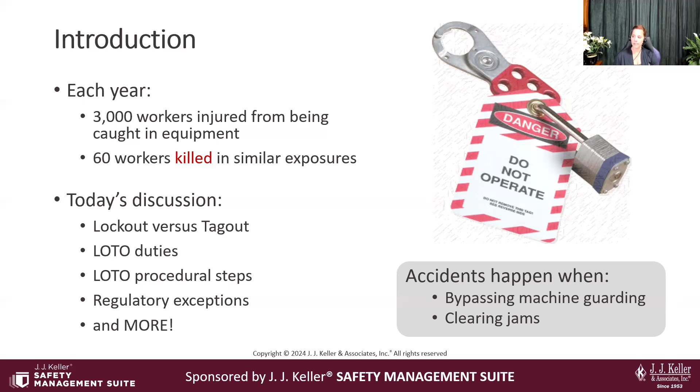Sorry, trying to get my computers here clicking through too.

Sorry about that. So in an effort to modernize the designs, manufacturers may use computer-based controls in their equipment, but you want to be cautioned that recent technological advancements that use computer-based hazardous energy controls, these might be things like mechanical, electrical, pneumatic, chemical, and radiation, may conflict sometimes with OSHA's existing lockout tagout standards. So you want to be really careful on which ones you're using and look deeply into that.

Additionally, there are some national consensus standards and international standards that are trying to harmonize things to govern the design and use of these computer-based controls. This approach of controlling that hazardous energy is more accepted in other nations, which raises issues of needing to harmonize US standards with those. So again, kind of on the leading edge of those sorts of things. So just want to make you aware of that as well. The agency has recently seen an increase in requests for variances for these devices also. So a planned update to the standard is on a bit longer of a road now than they originally anticipated.

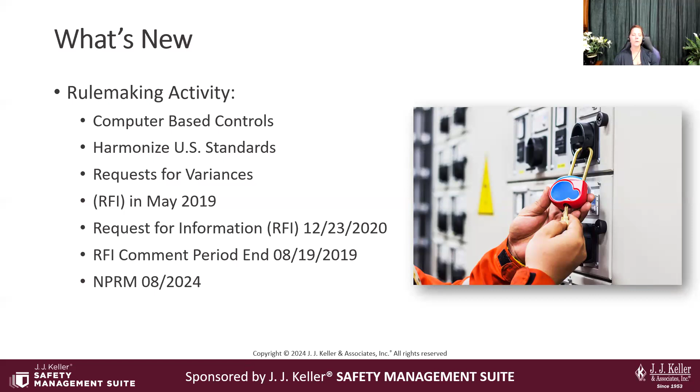So with that, I'm going to turn it over to Joe so he can just kind of see where everybody sits with a knowledge check, I believe. Is that right, Joe? Yep. Thanks, Cindy. So yeah, we want to start out here with a quick knowledge check. And we're often asked to explain the difference between service and maintenance when it comes to lockout tagout. So take a second, what do you think? Is there a difference? You can go ahead and post something in the chat if you want.

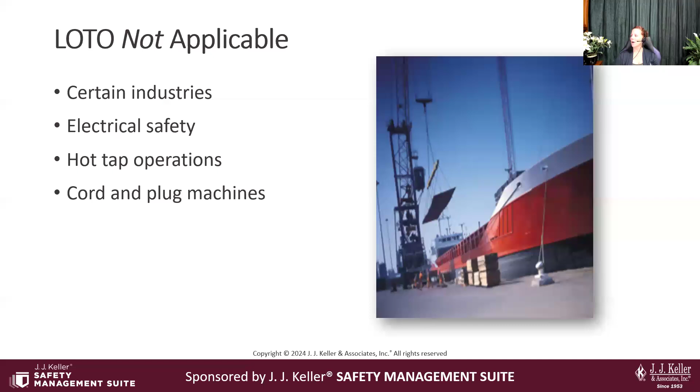Quite a bit not included in the standard, right? But yeah, let's talk about what is. Again, those normal production operations are not covered by the standard. So we always want to keep that outside and separate. And why is that? Well, it's because normal production operations don't ask employees to bypass the safety features or place themselves in harm's way. When we have those normal production operations, we've planned to keep our employees safe. And a lot of times these are tied to other standards, machine guarding or things like that, that keep our employees safe.

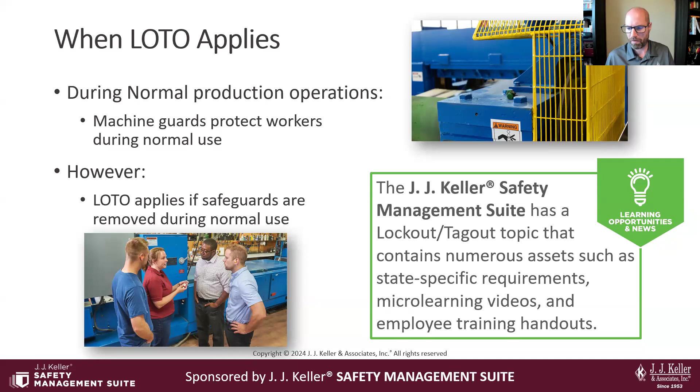However, barring that minor servicing exception that Cindy talked about, most servicing and maintenance during normal production operations is covered by the standard if. And the big if is if an employee is required to remove or bypass a guard or other safety device, or if an employee is required to place any part of their body into an area on that machine or piece of equipment where the work is actually performed, that point of operation. So where that punch comes down, where that press comes down, those are the areas. If I'm going to place my body inside of there, logically we've got to do something to make sure that energy can't harm me. So let's take a look at some of the descriptors on what these devices are that we're going to be concerned with now.

And OSHA's pretty clear on identifying what that means and what those devices should be. So the first one is identifiable. These locks and tags must identify the person who's applying them. So OSHA wants employers to use names, not numbers, titles, or departments. Those can be somewhat vague and not as clear. We want those names, and that should identify who applied the device. It quickly identifies the person responsible, and who to contact for information or on status of the job.

And there are some other ways to identify the authorized employee. We can engrave names on locks. We can add a small metal tab, for example, on the locks or things like that. So there are some optional ways, as long as we make sure they're identified.

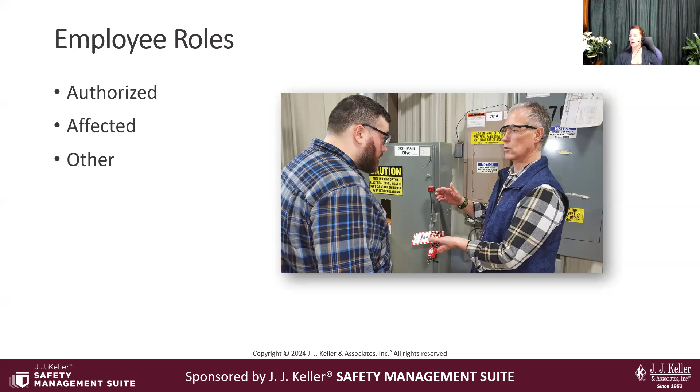Know how to isolate the equipment from its energy sources. So know whether you have to go all the way upstream or just the nearest breaker box, things like that. So very important information for the authorized person to understand.

So when it comes to affected employees, these are those folks that operate or use the machines that are being serviced. So it's your equipment operator, essentially. Sometimes these are the same people, but for the most part, OSHA does see two different roles designated for these folks. The affected employees are most likely to notice that the machine needs repair, so they're probably going to be the person to report it.

They'll also be most affected by the lockout because the equipment can't be used, right? So they're going to be sitting around waiting to see if anything's been fixed. They're also going to be the ones that are most tempted to start it up when maybe somebody's not ready. So another important reason why we do lockout. They don't do any service or maintenance work and must steer clear of the equipment during those repairs. If employers want machine operators or other affected employees to do any maintenance or repair work on a machine, they have to be trained, step up to that next level of training as authorized employees.

Most employers have employees who don't operate machines or do any equipment service or maintenance work. This will be somebody like maybe an engineer that's out there. Some supervisors don't even do the maintenance. They're there to supervise, so that's their role. They are going to fall in that category of other.

Okay, so the standard says that all other employees whose work operations are or may be in an area where energy control procedures are being utilized have to be instructed about the procedure, about the prohibition on trying to start equipment that's locked out, how to recognize those devices that Joe just covered, and things like that. So just to get a little idea there.

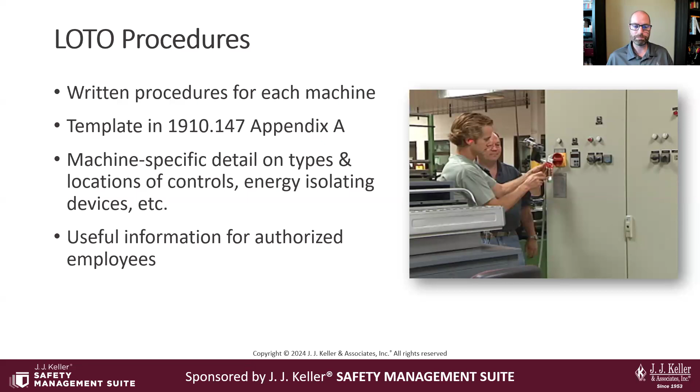So again, we want to include all that pertinent machine information on each specific procedure. If you assign numbers to the machine, make sure to match the procedure to those correct numbers. Also, we want to make sure that they're sequential. And what do I mean by that? These procedures should be easily followed. Keep it simple. So sequential. The authorized employee should be able to follow that written procedure right through step by step.

Okay, then the next piece is going to be to check and make sure that these procedures work. So initially, you're going to want to observe one of your authorized employees and make sure that they can follow the written instructions. What I write may not be clear to you. So if you're following one of my procedures, I want to be out there and I want to see you do it. And I want to make sure you can interpret what I created for you in the appropriate way.

And that's so important. And you're going to find a lot of that out. I found a lot of that out. The way I wrote things wasn't interpreted the same way. And you'll get better and better at that. And then you always want to re-verify that the procedures work, and always verify, of course, that the machine is actually de-energized before the employees start working on that machine.

One other thing to note is that OSHA doesn't require employers to issue a work permit or keep a log or even a record of these events. Some employers like to have these records, but how the permit system or log is set up and administered is completely up to the employer. Again, that documentation is important. If it's not documented, it didn't happen. So remember that as you're working through this.

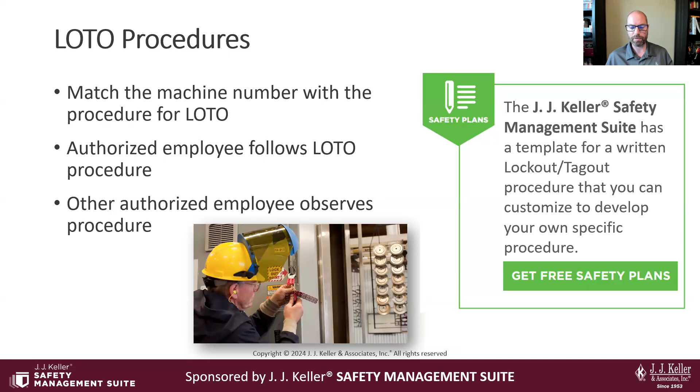All right, now let's look at the simple steps. One is you want to let the affected employees know you're going to be doing lockout tagout. Those who are affected, those machine operators, everybody else: I'm going to be doing lockout tagout. Then we're going to want to shut down that machine. So standard process, shut down the machine. Then we're going to isolate the machine from the energy sources, by whatever means is laid out in that procedure.

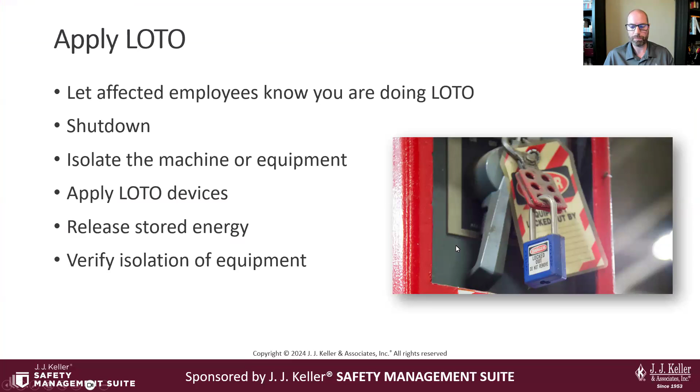Then we'll apply our lock and/or our tag to make sure that it's secure. Then we're going to release or restrain any of that stored or residual energy. That's a very important piece that sometimes gets forgotten about. And if the possibility exists that we might reaccumulate some energy, we have to make sure inside our procedure that we account for that. And then we're going to want to verify the isolation and that the machine is de-energized. Most important step out of all of these: verify that what you did worked. And then you can begin your servicing activities.

So the next step is removing the lockout tagout. Employees can be seriously injured or killed if someone removes that lockout tagout without their knowledge. It's critical that employees respect the lockout tagout, and only the persons who applied it remove it. During that procedure, especially when I'm starting things back up, there are some steps that the authorized employee is going to take into account that someone else may not even see.

Removing tools, making sure that all the loose parts and all the components are put back together like they're supposed to be, and then ensuring that the machine is operational. So we want to make sure all those things are in place as we're going through the process of removing that lockout tagout. Then we're reversing the process back out and starting up the machine. With that being said, I'll send it back to Cindy.

Thank you, Joe. I like to reiterate that step of double checking that your lockout has worked. I should probably just bold that one from now on so that we emphasize it. Most important step: just make sure it worked before you start working on things, right?

So moving on a little bit about grouping similar machines. OSHA tries to make sure that things aren't just a pain in your neck. That's not their goal. So they have this option of grouping similar machines. We've been asked by lots of employers if they can do this. This would be things that use the same type and magnitude of energy in the same procedure. So let's say you have multiple press brakes. I see somebody asked a question about press brakes, so we'll use that as an example.

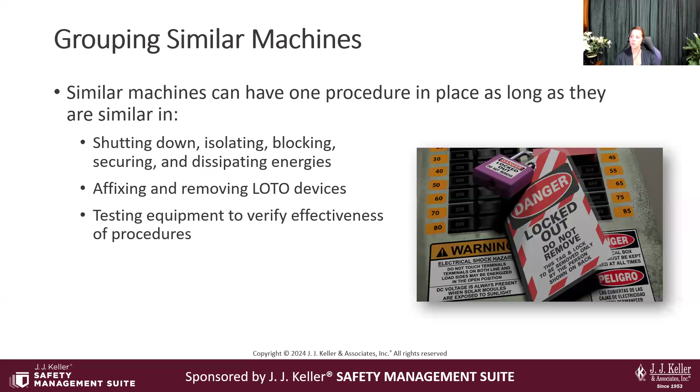For example, at the stainless steel manufacturing facility I used to work in, we had several Cincinnati press brakes. We were able to group similar brakes into a single lockout procedure, and the same with similar die setting machines. They do allow this when the equipment has the same or similar control measures. So just something to keep in mind to make your life a little bit easier.

Here's another surprise for you. You don't always need written procedures. A note in the standard says that under certain conditions, the procedure for a particular machine or equipment doesn't need to be in writing. Now, here are those conditions. Because again, we keep saying that which was documented was done. So documentation is key, but here are those conditions.

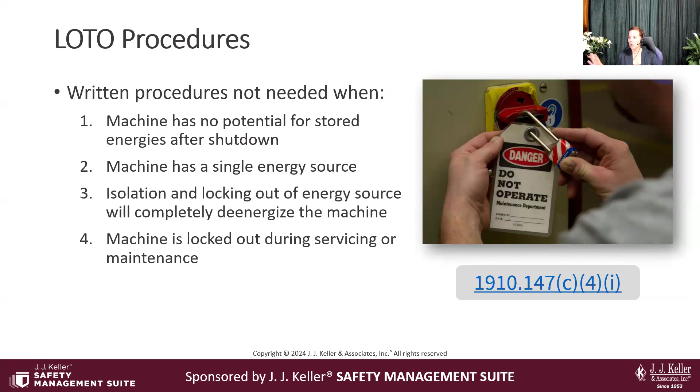If the machine has no potential for stored or residual energy or reaccumulation of stored energy after shutdown; if the machine has a single energy source which can be readily identified and isolated, like a drill press, a vertical bandsaw, or a bench grinder; the isolation and locking out of the energy source will completely de-energize the machine. All of these have to apply. And the machine is locked out during service or maintenance. But wait, there's more. Let's go on to the next page.

A single lockout device will achieve a lockout condition. The lockout device is under exclusive control of the authorized employee; we talked about that with cord and plug. The service and maintenance does not create hazards for other employees. The employer using this exception has had no accidents involving the unexpected activation or re-energization of any machine during servicing or maintenance.

Now remember, this type of equipment still has to be locked out. It just doesn't have that written procedure. Joe and I are in favor of written procedures because that takes out the guesswork. If you're curious where to find this, it's in paragraph (c)(4)(i), and I put that here on the screen for you.

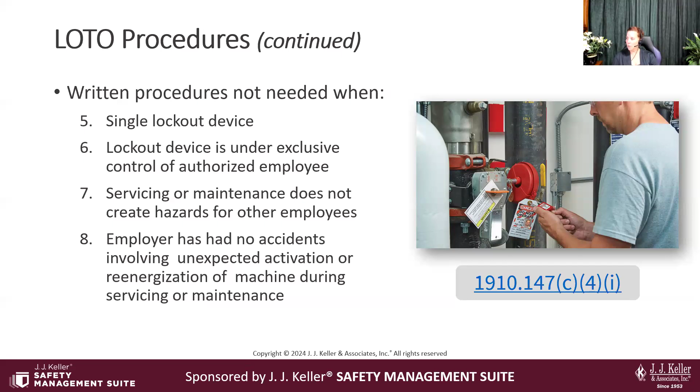So with that said, Joe, what about my favorite, group lockout? Yeah, let's talk about group lockout. When more than one person works on a machine, employers must take steps to ensure that each authorized employee is individually and equally protected.

Then the person who applied the operational locks locks all the keys in the box, and then the other authorized people can add their locks to the box. So it really saves on all these hasps and all these locks and everything else going on. The other authorized employees, OSHA says, still need to have the opportunity to verify the locking.

So in the case of lockout tagout, I have some examples, but I know we're moving on the clock here. You want to make sure you take the time so that even if your buddy locked everything out, you double check the energy isolation yourself before you work on that equipment.

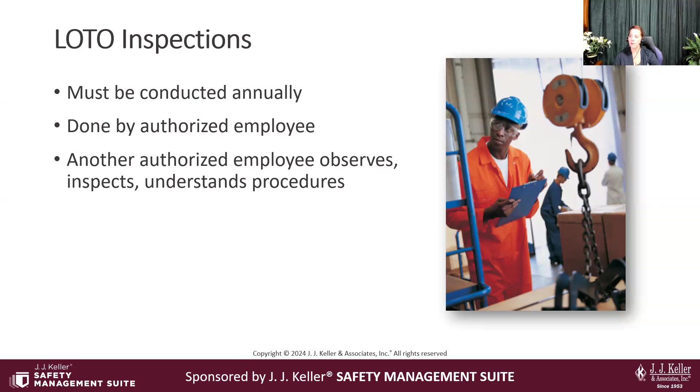These inspections can be done in different ways. You can have your authorized employees who normally use the procedure, or an authorized person from one area, lock out a machine, see if the steps make sense. So different ways you can go about it, but just make sure that you're doing that annually for each one of your programs. Remember, the goal is just to make sure that the procedures are being followed and that people are being safe from unexpected energy.

We've discussed grouping individual procedures for similar machines. The same concept can be applied for the inspections, as I mentioned. As part of a periodic inspection, all of the authorized employees who typically use a procedure must be included in a review of the procedure. Okay, so you want to make sure that you're involving the people that actually have to do this.

If an employer uses tagout instead of lockout, then the affected employees must also be included in the review. So make sure you don't forget those authorized and affected employees both. OSHA wants to make sure that employers are taking extra steps for tagout because that system, as you know, doesn't use as strong of a protection as a lockout. So make sure you're not forgetting that.

Again, if you find deficiencies in your procedure, update those procedures and then follow up with the training. And don't forget to certify that those inspections are being done, right? We keep hinting on that. Make sure you identify in your certification the identity of the machine, the date of the inspection, the employees that were included, and the person that did the inspection itself.

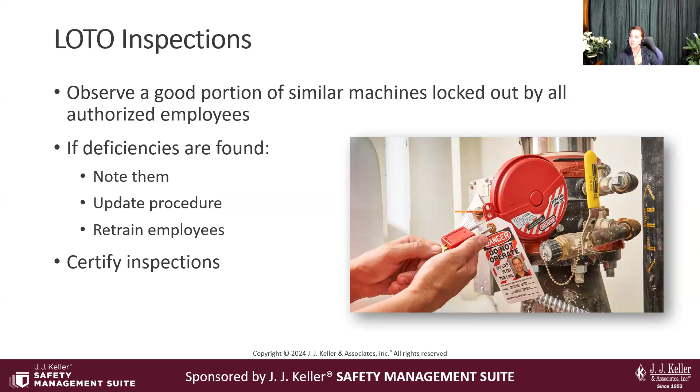A little bit about the minor servicing exception that Joe talked about. Again, those performed under normal operations are exempted from the standard. We kind of already discussed that, but we just put a reminder slide here as we get towards the end of our presentation. This exception is limited, don't forget, and applies only when economic considerations prevent the use of prescribed energy isolation measures and when the employer provides and requires alternative measures to ensure effective protection, equal protection as a normal lockout would be.

The standard contains specific criteria that must be met for that minor servicing. Again, for changes and adjustments and other minor servicing. I think we have a question about alternative measures on press brakes, so this would be for you. Other minor servicing activities that take place during normal production operations are not covered by the standard if, remember, they're routine, repetitive, and integral to the use of equipment for production. Remember, it's required that the work is performed using alternative measures which provide effective protection.

I think the question was specific to press brakes and how to do that. That might be a situation where you'll want to contact us. Use that safety management suite expert help question for specific alternative suggestions that we might have. But to get back to this, the employer will have to state their case to OSHA if you're using these. So when you do have alternative measures, you do need to justify why you're doing that. And then document your production process as to how you arrived at your conclusion, train your employees, and then OSHA will be satisfied with that.

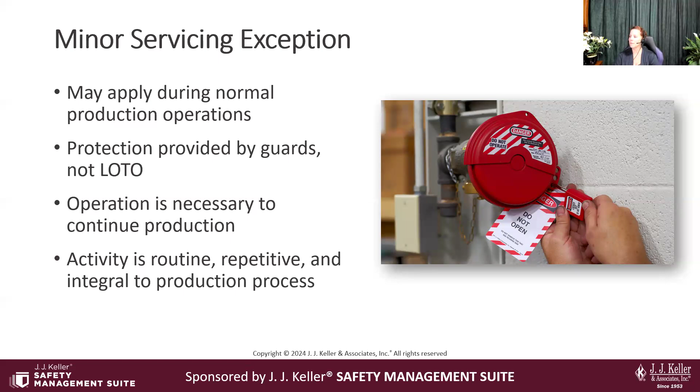Three specific criteria, again, can be used to determine if the exception applies to a particular activity. First, it must be conducted during normal production operations, as we mentioned. Second, it has to be routine, repetitive, and integral. Okay, so those are things. And then finally, if all of those things apply, then you must use those alternative measures.

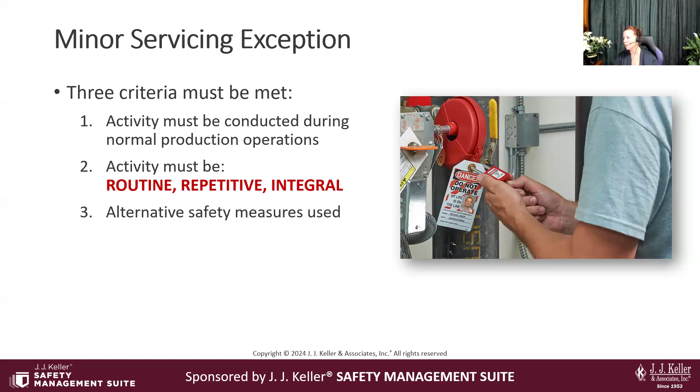So again, we keep trying to pound this only because we get that question quite a bit, so we just want to keep reiterating that for you. To explain just a little bit further, let's take a look at an example. So if an employer was allowing employees to go on top of a machine that has 2 conveyor belts to clear jams, this was an established practice that had to be done to get out production every single night, and the machine would not work unless jams were cleared.

Employees were used to kneeling on the conveyor that they had turned off. This is actually a situation in ag that we had dealt with. They had to turn it off so they could reach into the second conveyor belt where the jam occurred. The second conveyor belt was not turned off, and the employees were getting their hands and parts of their body on that conveyor. So OSHA allowed the minor servicing exception to apply in this instance, but did cite the employer for not using tools to clear the jams.

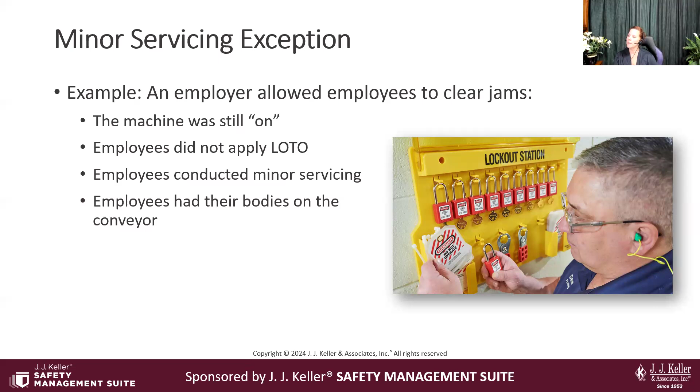Okay, so tools, being able to use something other than the human body to reach things to clear jams, was what they considered an alternative measure. So just an example there for you. And that might work for the press brake situation, that question that we were asked. So this often brings up another question: what are tools? According to OSHA, they consider tools push sticks, push blocks, things that are going to provide employees working with machines to keep themselves distance from the place of pinch points or points of operation.

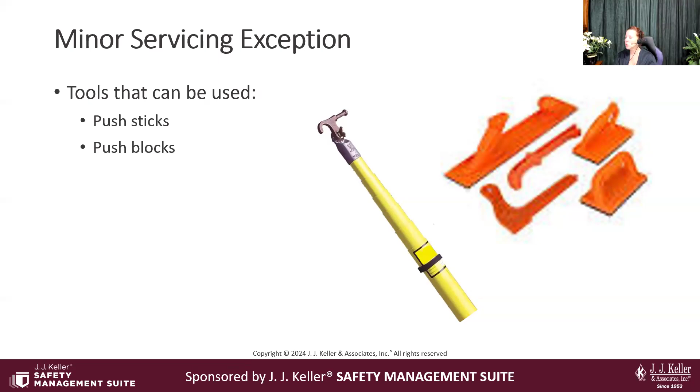Push sticks may become damaged, lost, or otherwise need to be replaced. So OSHA will look at that. If that's your alternative means, you have to make sure those alternative means are up to snuff. So you're inspecting those to make sure that you can use them. And under no circumstances should employees put their hands in the hazardous operating areas of machines. So even with a tool, don't get too close to those operating points.

All right, Joe, I know I'm going through that pretty quickly, but I'm going to turn it over to you for an overview on electrical lockout real quick. All right, last section. Yeah, great. So OSHA does have more specifics on electrical lockout, and there are some key components to this. One is generally now you're required to have both a lock and a tag. And again, you can apply a lock without a tag under some certain instances, and they're pretty clear. Only one circuit or piece of equipment is de-energized, the lockout period's within that one shift, and employees are familiar with those procedures. So pretty logical, pretty basic.

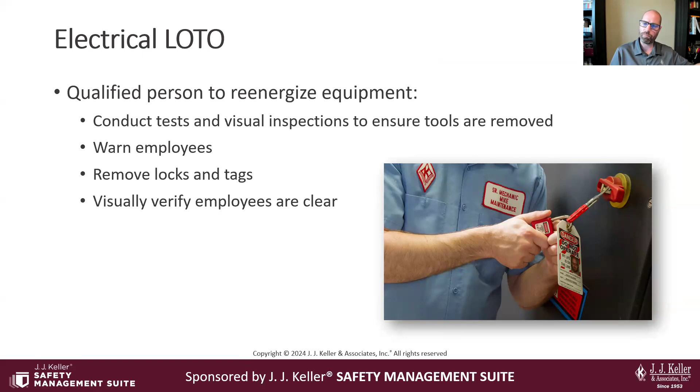So when we get to removing the lockout and re-energizing the equipment, again, you have to have that qualified person, and they have to be able to conduct those appropriate tests and visual inspections to make sure, including electrical jumpers, shorts, grounds, other devices. So it's just a little higher level amount of knowledge that's necessary when we come to electrical lockout tagout over mechanical lockout tagout.

So, some other kind of similarities: you can use the same procedures. You just need to modify those procedures a bit to address kind of the bullets there. The specific electrical hazards, the requirements if needed. Do we have to use tags and locks? Yes, no. You're going to have that written in your procedure. And then, of course, in big bold letters, making sure that you're saying a qualified person needs to verify this de-energization process. So that's so important to the procedure for electrical. So keep that in mind, qualified person. Then I'll pass it back to Cindy.

Thanks, Joe. And whew, a lot of information, very important information. Lockout is so important. Sometimes I wish we could do a 4-hour session, and I'm sure people don't want to do that, but I like lockout, so I'd be happy to do that.

But let's sum up some key points real quick before we go into Q&A. First, remember to document your lockout procedures, including for multiple shifts and group lockouts. You want to identify those employee roles, the authorized, affected, and other, and provide appropriate training.

Again, don't forget your temporary workers and contractors. You want to perform and document your periodic and annual inspections on your procedures. And those must be conducted by authorized employees with another authorized employee looking on. Always good to have multiple sets of eyes.

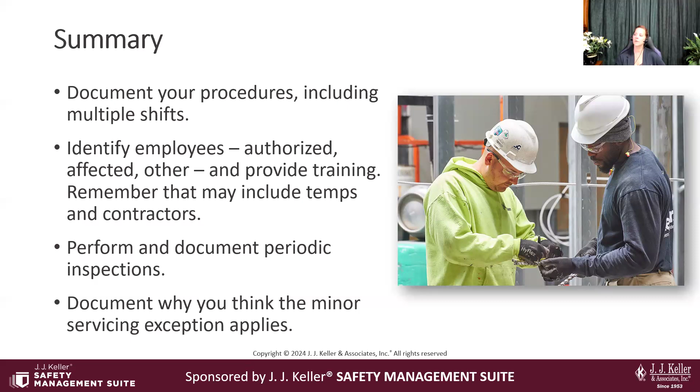Make revisions to your procedures if they need updating, especially when equipment or operations change. And document why you think the minor servicing exception applies to certain situations in your facilities. Because if OSHA inspects your facility, you'll be all set with the necessary documentation that you need ahead of time. So want to make sure that you're doing that.